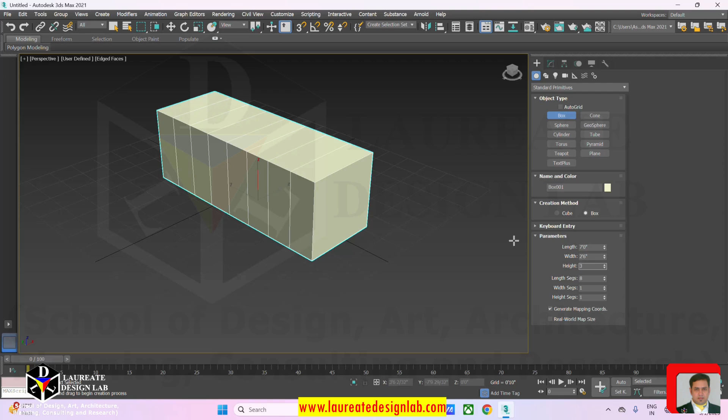First, go to a box, take a box like this, and take the measurement. Suppose you are taking a 3 seater, so let's go by 2,2,2 and 6,6 - that's 7 feet. After 7 feet we'll do tab and go to width - 30 inches. And then height - let's have 2 feet 9 inches, that'll be better. So this is the height.

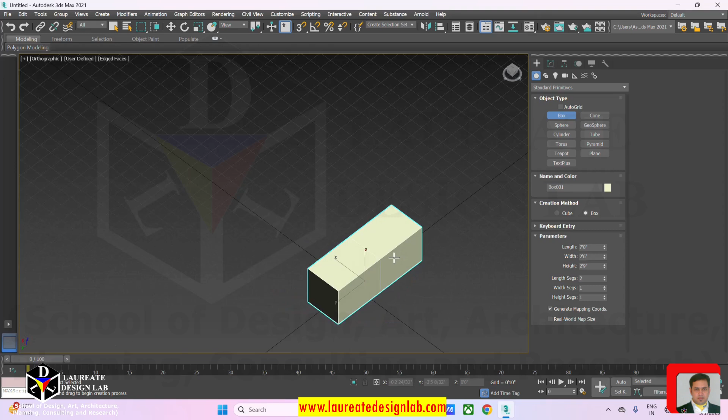After doing this, I'll have to check the number of segments. So I'm going to have just 2 segments like this - no, one more is required, 3. So let's have 3, and I'm not going to have anything else. Okay, so G for grid off. Now we have this before us.

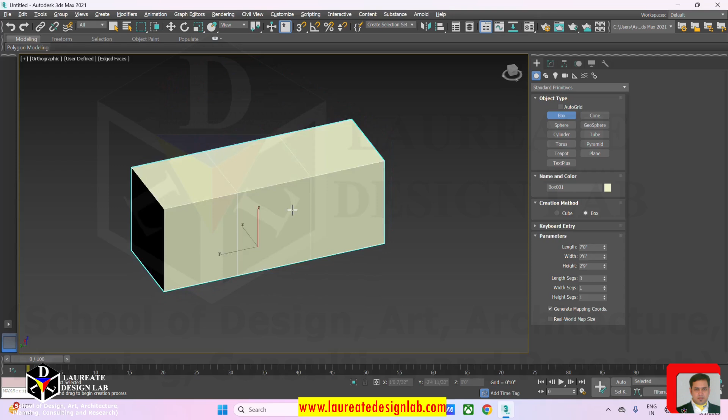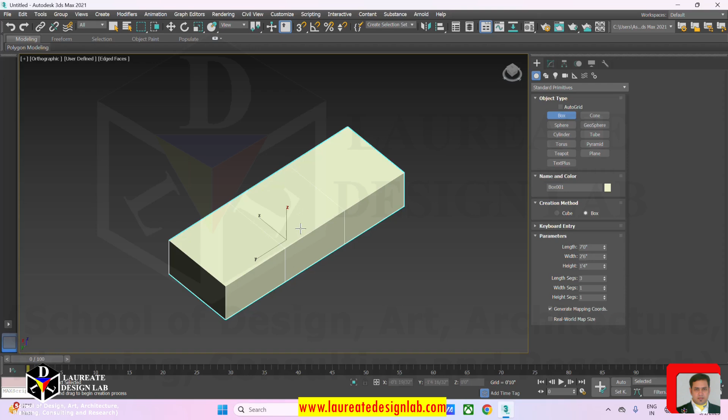What to do? So to begin, what I believe is that I'm going to reduce this to say 16 inches because I'll make the backrest later. I'm not going to make backrest now. So now what to do?

So once we have this, then why not make the backrest now only? I think now I'm done with it.

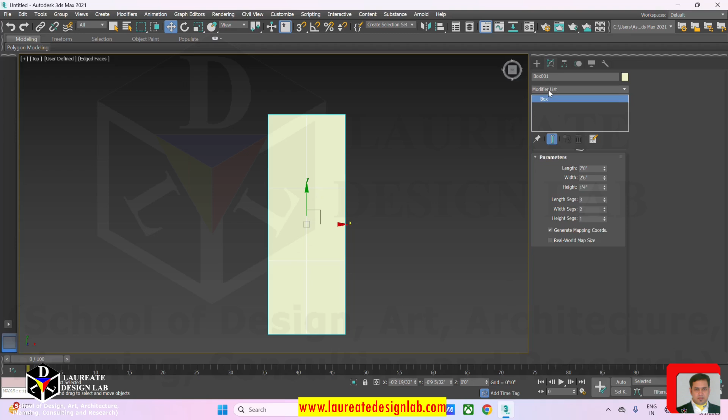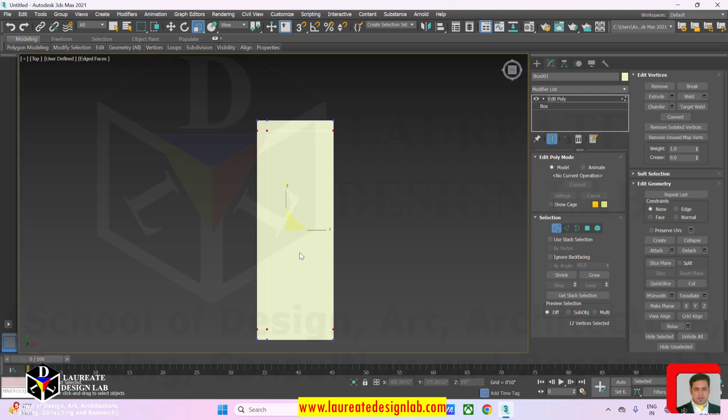Go to move, then convert to edit poly, take these vertices and move backside like this - almost 6 inches. And then take these together, go to scale and do it like this. It's done. So I have fixed the armrest and the backrest.

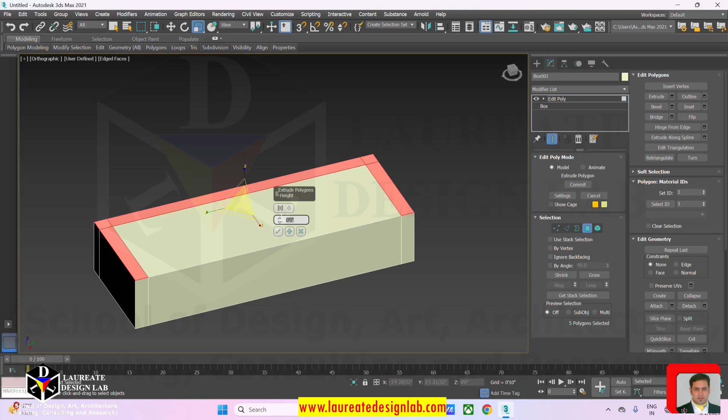Now I'll take one by one these polygons and extrude it. How much to extrude? We can extrude around 18 inches, but I'll go with 15 inches. I want a low height backrest because the backrest along with the armrest is on the same level. That's why.

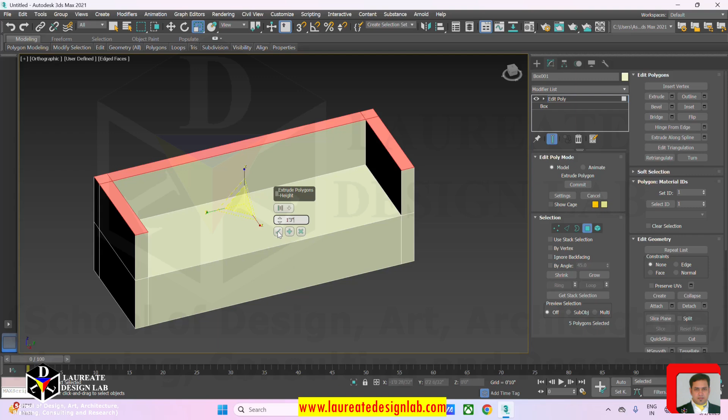Got the point? Yes sir. So if you can understand that, we have these things together. Now what we are going to do is take the edge - I'll select all these edges and then connect, 2 times, because we want to have a 3 seater.

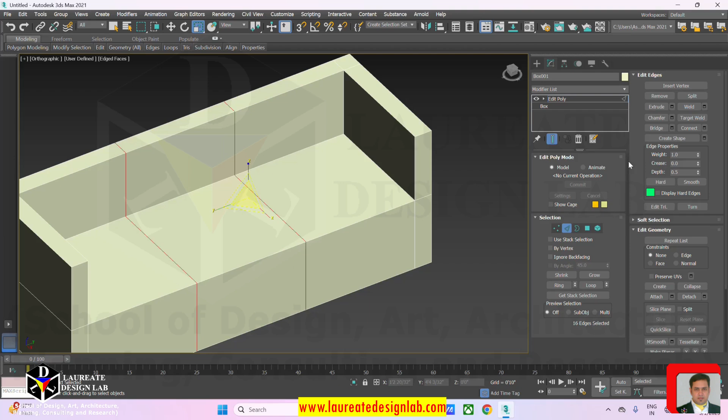After doing this, I'll go to chamfer and I'll have this much chamfer here. Okay, got the point? Yes sir.

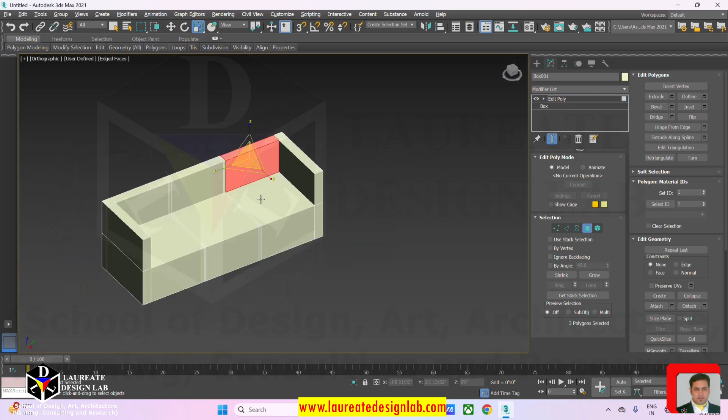Now I'm going to go to the polygon. I'll take these polygons together. But the problem is I have to select all these 3 together to work in one go. So I'll do it like this and then press Control, select again. Even you can do this together, but I'll prefer to do this later.

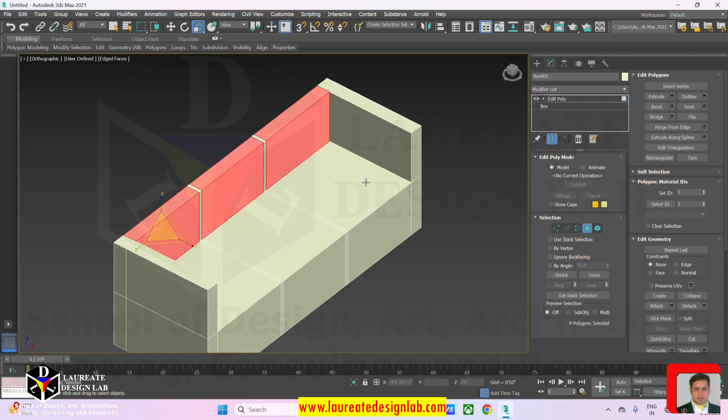Let's do these 3 things first, and then we'll move to the handrest, then the seats, and then the body. Okay, this will be the sequence.

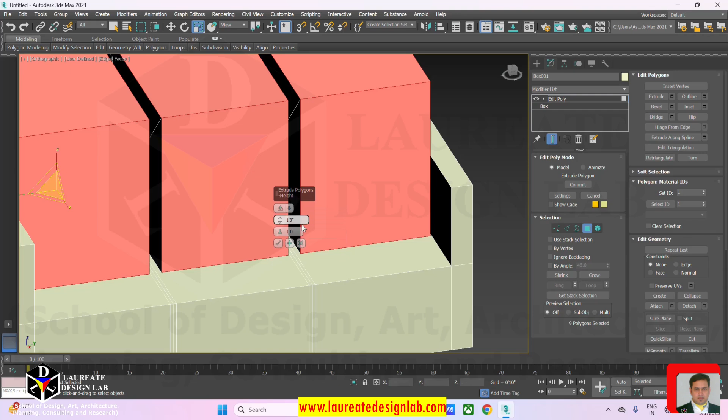So I'll go to inset - I'll do the inset a little bit, this much. Then I'll go to extrude by local normals. Okay, and then we'll reduce it to this much. I believe this much is enough.

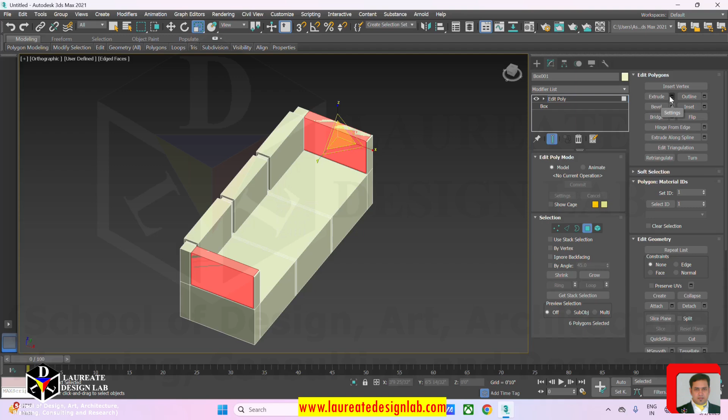Same thing I'm going to do here along with this. So the last time the inset value which we have taken, it's in memory. So simply we'll have to do this and then OK, extrude, and then OK, it's done.

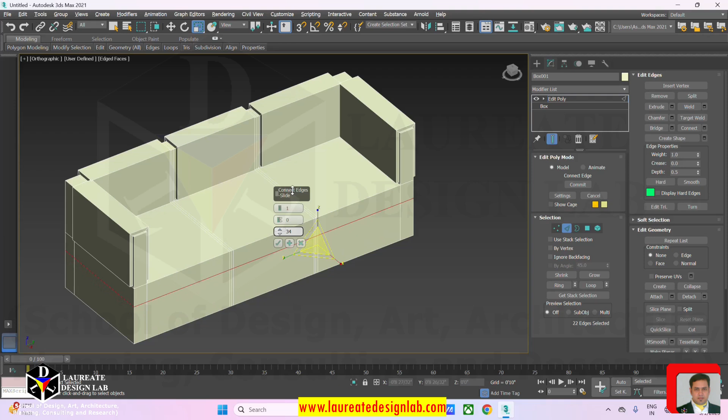Now we'll have to do a little bit of work here. Select this, then do the ring - all are selected here, and then we'll go to connect. In the connect section, maybe we'll go with one only, and let's move it up like this. I think this is better.

Now I'll take the polygon here and this together.

Same inset, same extrude. Got the point? Yes, sir. Now let's check what is happening.

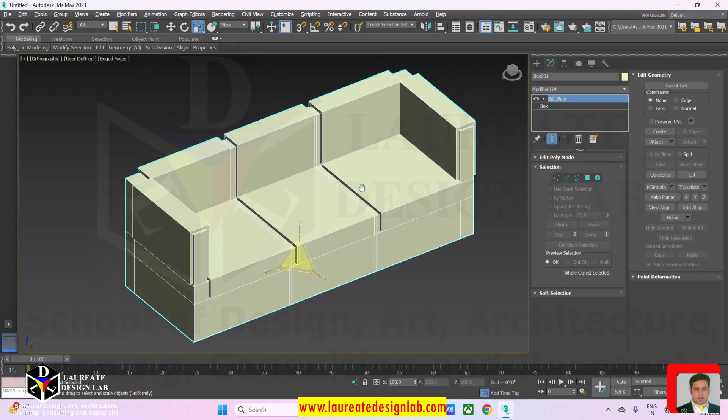So for that, we'll go to the segment over here. Once it is ready, now you will have to do one thing. Since we have used the edit poly modifier, now we'll have to convert it into editable poly to get this NURMS subdivision. So while using it, I can understand that yes, it's taking the shape.

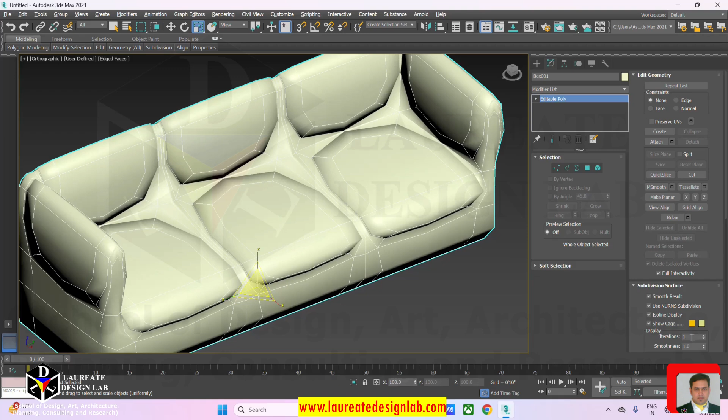Let's have the iteration a little bit more, yet it is not coming. Don't worry, for that again we'll have to do the edge. Select the edge, then ring, and then do the connect. Now you'll have to do with two numbers, right?

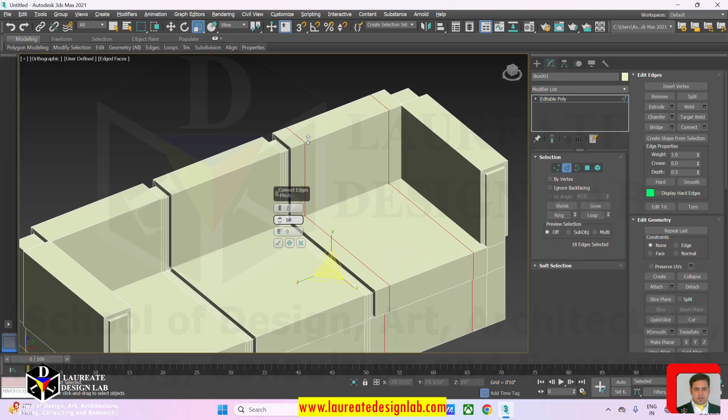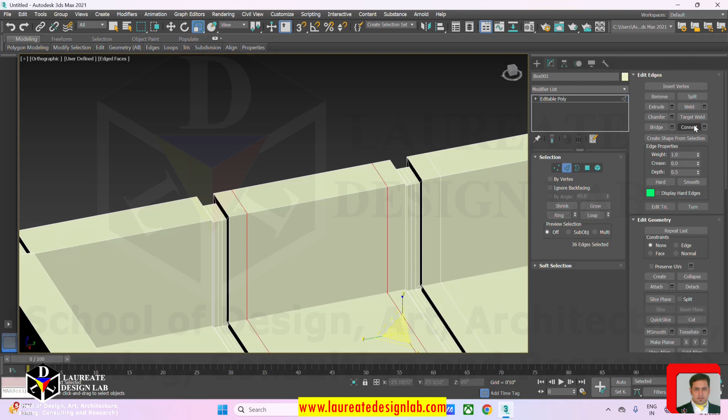Yes, sir, so keep it like this. Same thing we'll have to do with this ring, then connect, because the memory of this software is such that whatever setting you have used last time with these, it will retain in its memory.

Select this again, connect. Oh sorry, you'll have to do the ring first and then connect, accept it. Okay, same thing here, we'll have to do the ring and then connect. Now let's check what is happening.

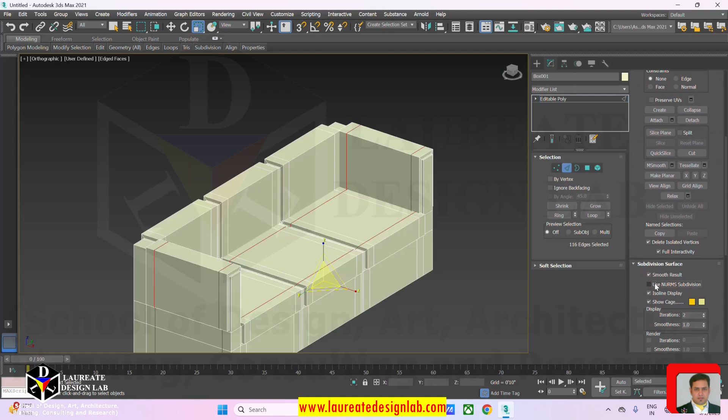So we can see, yes, it's going in the right direction, right? But the problem is with this area, so we are going to work in this area again. For that, let's take the edge, then ring, then connect again.

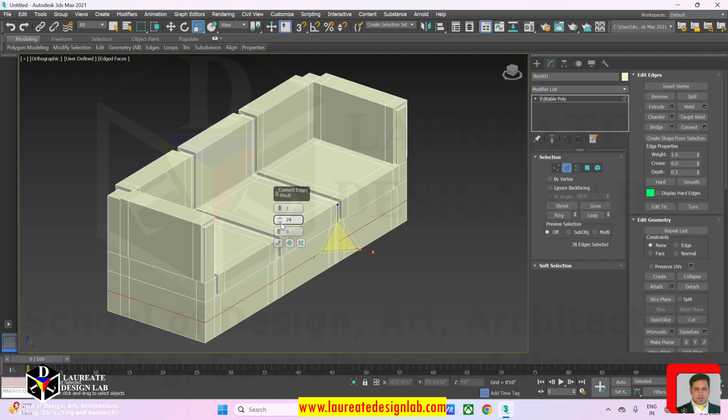Let's have just one, and then we will move it to the downside. Okay, because we don't need to protect this area. If it will be required, we'll do the connect again, right?

Yes, sir, so use NURMS, check whether it is happening or not. Do you feel this is okay? Then it's okay, otherwise you'll have to work again.

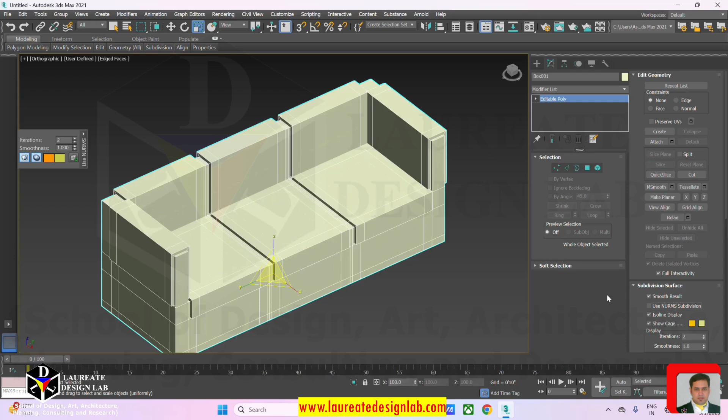I feel this curve is not working. For that, we'll have to take the edge over here like this, and then connect with two numbers. Before that, you'll have to do the ring and then connect, and let's move it.

Downside, right? So you'll have to adjust like this, and move it like this. I hope this is now going to work 100%.

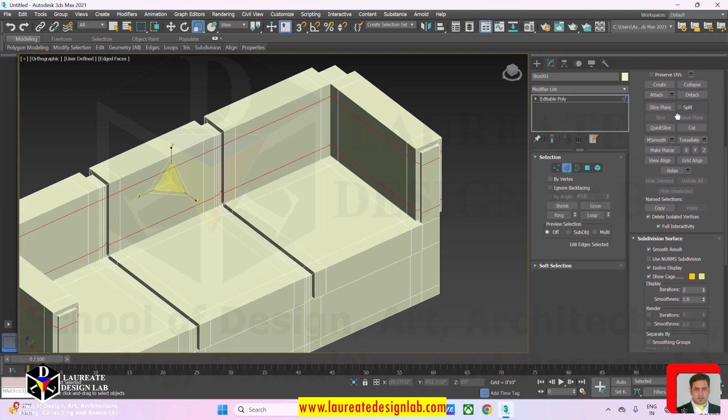So what do you think? Is it really working or not working? Check it if you're satisfied, else we can still work on the edges.

More the polygons, better the shape. So anything extra you want to obtain from this, you can.

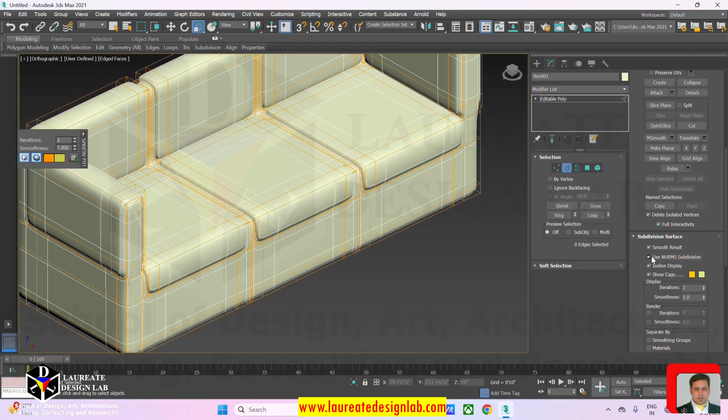Suppose I select the edge over here, this one, this edge, and then loop, and then I can do one more thing, I can extract it.

Create shape from this selection. Linear, because this is in line. Okay, and if you want it in a smooth way, then you'll have to go to this.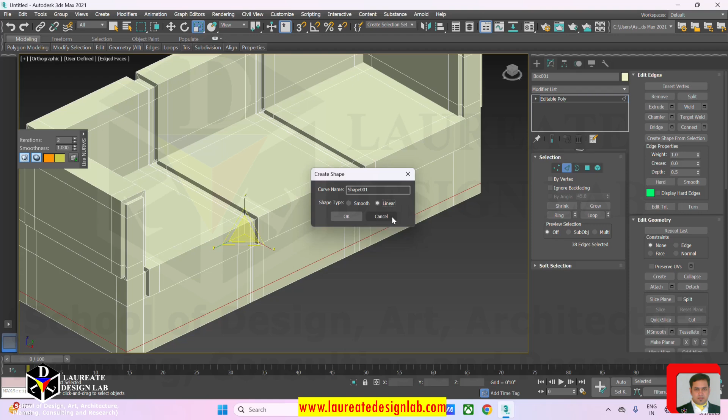Okay, and then you'll have to select this, because curve is coming now. What is coming over here? Curve is coming. And if you don't want this, so you do one thing.

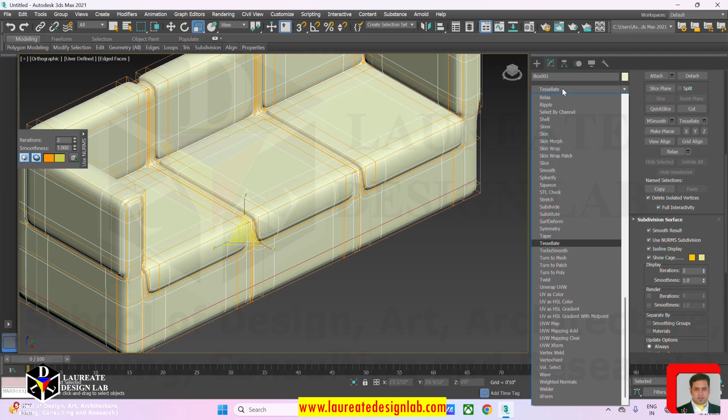First you do the turbo smooth. Do the turbo smooth. Once you are done with the turbo smooth, then do the edit poly.

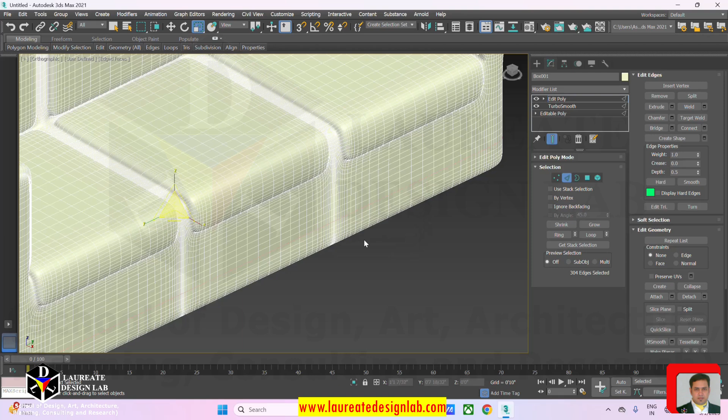Edit poly, once again go to this, take this loop, and then you'll have to create shape with the linear. Let's come out of it, select this, go to render, enable, make it like this, choose the same color.

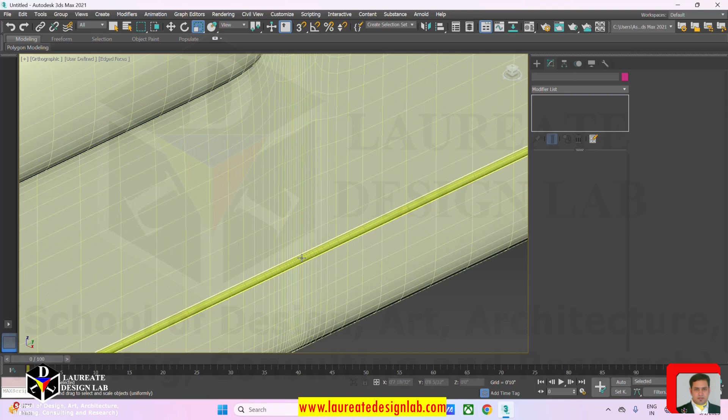So maybe this color, so this is kind of got the point. What is this? This is kind of a rope which goes around, so you can do it multiple times as you wish, like this.

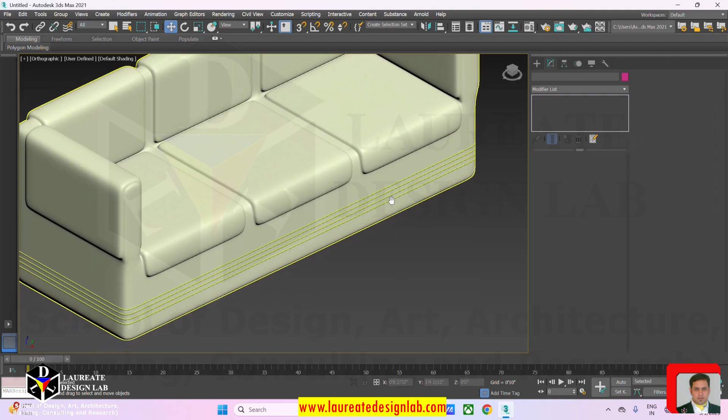So this is how one can obtain a wonderful looking sofa. Hope you have understood.